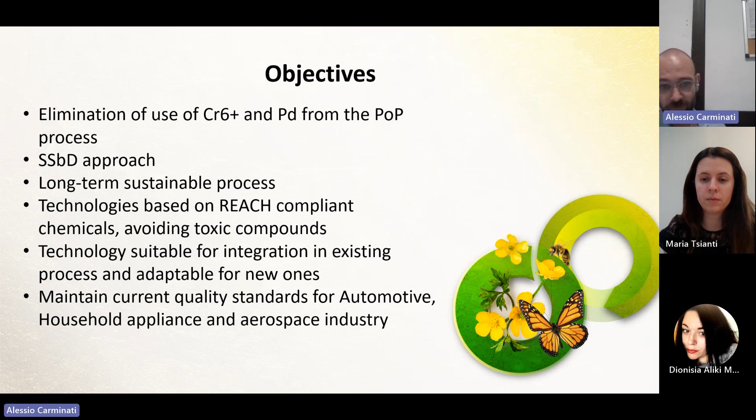Right now, the objective is also to develop a substitute process capable of fitting inside the already used technologies, or needing just a little bit of modification. And of course, to be effective for the industry, you have to respect the same quality standards that are already used in the industries with these products.

So plating on plastic is found almost everywhere in daily life. You can see here some trim, some plastic parts inside a car that are covered in metal, but are made, of course, of plastic. The most used plastic is ABS or ABS polycarbonate, and this kind of material is widely diffused almost everywhere.

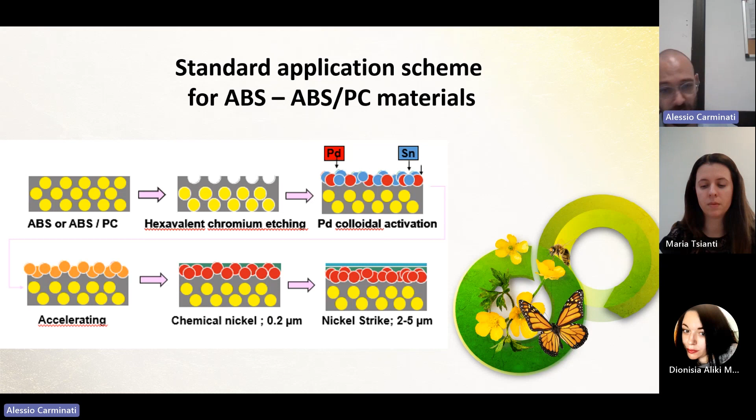Basically, the process involves a first step in which the surface is made capable of sustaining the metal plating at the end of the process. So we have an etching with hexavalent chromium that roughens the surface, and then an activation with a noble metal, palladium, that will maintain the substrate capable of receiving the chemical nickel, the electroless nickel, on it. These are basically the steps involved and the type of parameters of a standard process.

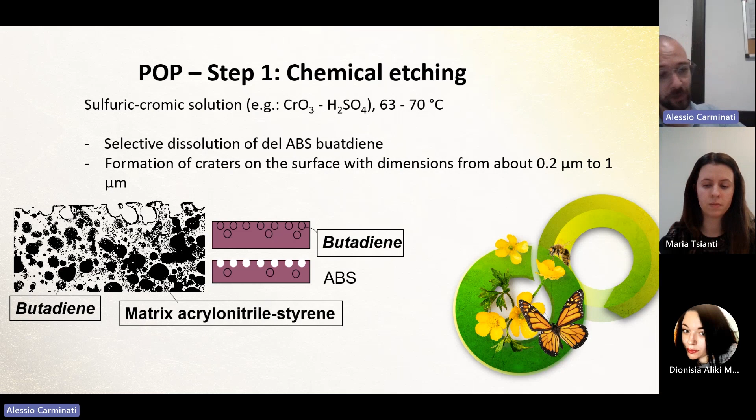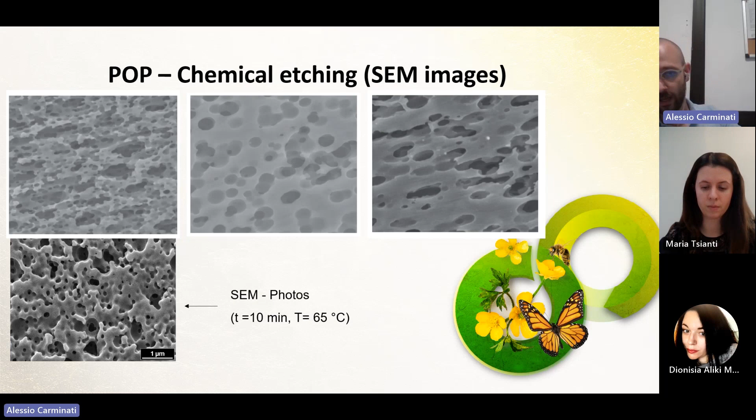There are quite a few steps, also because it's quite a mature process, the one of plating on plastic. But basically, the more toxic step is, of course, the one involving chromium 6 - chromium trioxide and sulfuric acid at high temperature, which causes the selective etching of ABS with a good property of the surface for most metals. These are the effects of chromium 6 on the surface of the material seen under the microscope.

After that process, we have a series of steps that involve the neutralization of the chromium, also to be sure not to put it in the environment, because it's a high risk of pollution and permanence in the environment.

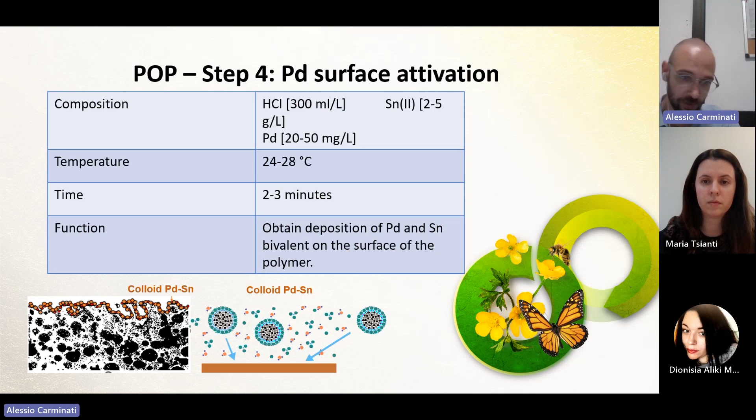The next step is just preparation with hydrochloric acid, and then we have an activation with colloidal palladium, which is not very economical, but right now is the most used solution for the activation of the surface, because it's a very good activator. Then some other steps involve the final activation and the plating of the plastic.

So FREEME has two types of technical approach to remove chromium and palladium. The first one uses a special resin developed inside the FREEME environment, using a green process and sustainable chemistry from the beginning of the synthesis of the resin.

On the other hand, we have a different approach that involves the use of other chemicals, but the same type of plant currently used — a plant that involves a dip process of a part.

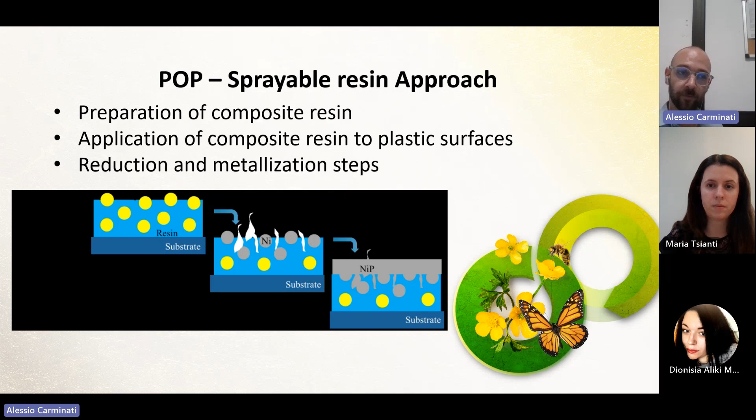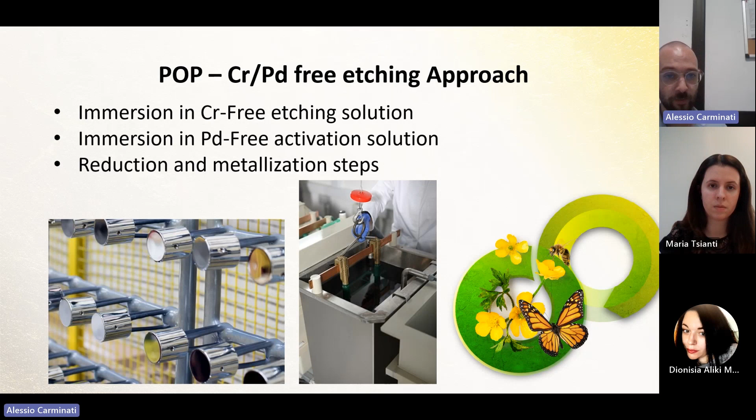So the output of this process is, in both cases, the inclusion of metal particles that will catalyze the reaction of electroless nickel on the surface, and then the further plating of other metals on the surface. This is the kind of racks and plating equipment that will be used inside the project.

For the project, we'll also use more modern modelization techniques, like the in silico approach or other parametrical modelization, so that the output of the process can be seen before the end of the process. There will also be an inline protocol that uses spectroscopy to inspect the part and assess the quality, meeting automotive and aerospace quality requirements.

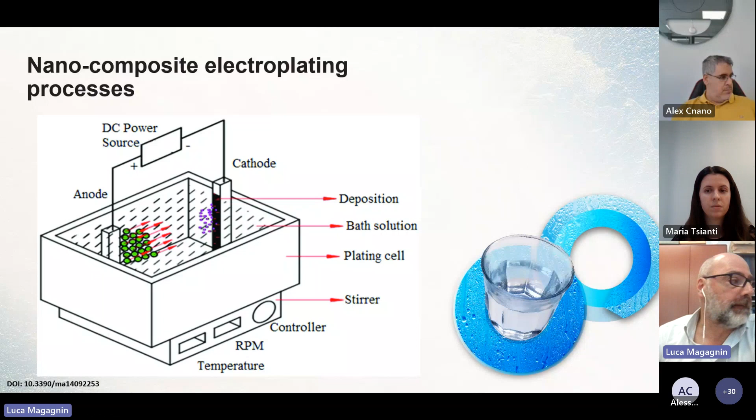So the equipment, in order to maintain dispersion, is an important part of the project. The capability to analyze and verify the dispersion, as I mentioned, the online monitoring, and very important also all the aspects related to simulation. So the capability to foresee how many particles will be co-deposited in specific conditions, in correlation with the geometry and size of the final component.

Here are the work packages, mainly dedicated to the major aspects I have mentioned. So apart from work package 1, management and coordination, of course, as we know, all the coordinators know very well these work packages are really important.

The first part of the project, we are more or less at the first year, was dedicated to the definition of the specification and the requirements, because we are within the idea of safe and sustainability by design strategy. We have to collect the needs and the possibilities to meet these needs and to define the best strategy in terms of safety and sustainability. So it's not only safety, it's also sustainability of the process at the industrial level.

Then, of course, we have one work package dedicated to in silico work, as I mentioned, both for the simulation of the electrochemical process and composition, but also for the maintenance or control of the process.

A work package completely dedicated to safe and sustainable by design, for the use of this approach in plating of composite processes.

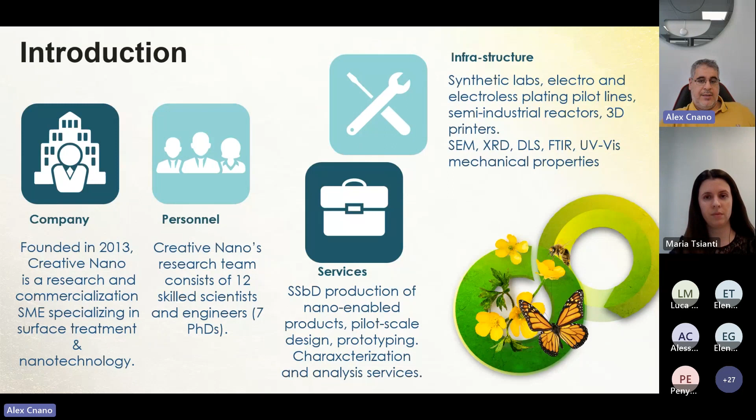Of course, our main target is to develop new types of coatings utilizing electroplating or electroless plating processes. We have synthesis labs, pilot lines up to 250 liters for demonstration activities and small scale productions. We have 3D printers and a fully equipped laboratory for characterization with SEM, XRD, DLS, FTIR, UV-Vis, etc.

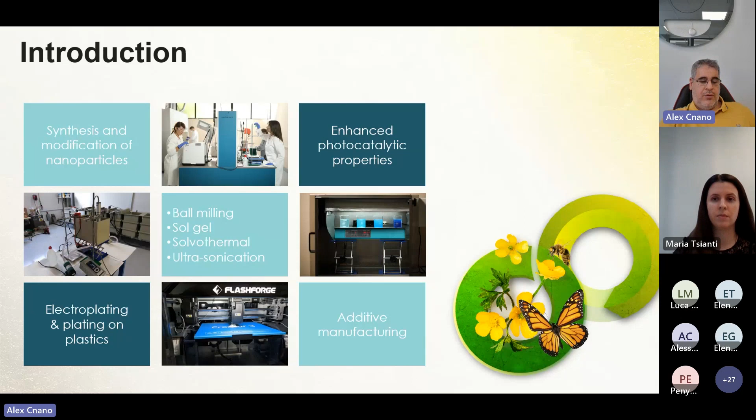As I said, we can work on electroplating and plating of plastics, synthesis and modification of nanoparticles, enhanced photocatalytic properties, various preparation methods with a great focus on the ultrasonication process and additive manufacturing.

Here we have some projects. I included the ongoing projects, except from Pure Nano, which was finalized some months ago, coordinated by Luca from Politecnico di Milano, related to the purification process of plating baths.

Nanopart is an ongoing project about development of methods for analyzing in situ nanoparticles for composite plating. SABYDOMA is a sustainable-by-design project for development of new types of processes and equipment that will be more sustainable and safe for the workers and the environment.

Diagonal is very close to the SABYDOMA project I mentioned before, but it works mainly with 2D nanoparticles like graphene. 3D Plate is a Greek national project about plating on plastics, and the two projects already presented by Alessio and Luca are the Frimi and the Mozart project.

So, the plating industry. The global electroplating market value and growth projection we can see here. We are discussing an industry estimated around 24 billion dollars. This number consists of the plating shops.

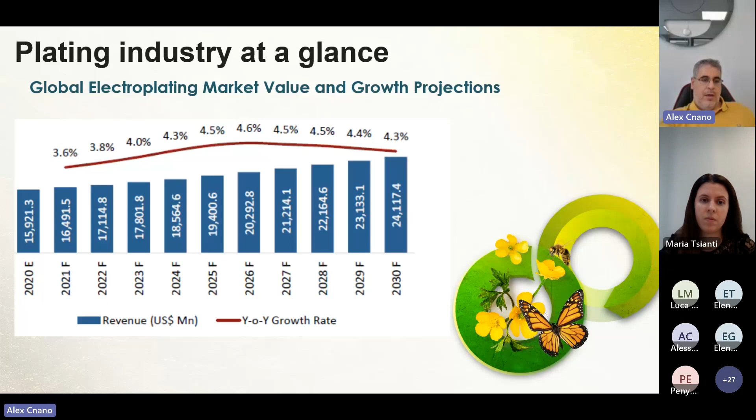The market that we're covering, based on the metal used and the end user we work for: number one is gold, not so much because of the mass, but mainly because of the price. Then we have silver, copper, nickel, chromium - steel chromium plating is part of this - zinc and other. The largest end user is automotive, followed by electrical and electronics, aerospace and defense, jewelry, machinery parts, and others like silverware, optics, etc.

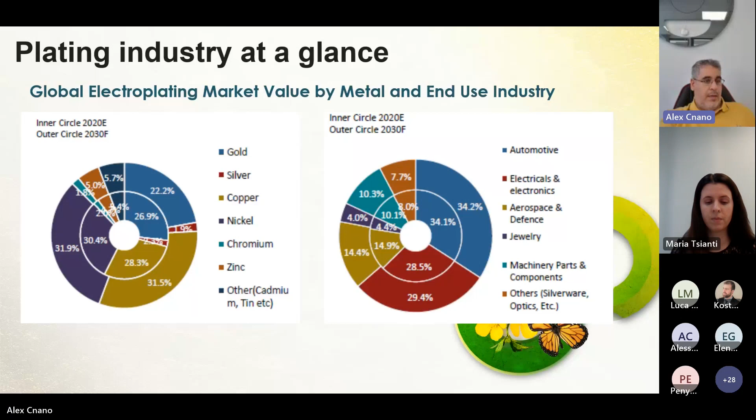The main driving forces - we have separated this into the main driving forces concerning the surface finishing and plating sector, and the supply chain and trends followed by the plating industry showing new advancements.

So the main driving forces are high demand from Asian countries, increased demand from diverse industries - this is a very important issue for what we will discuss in this presentation, that electroplating covers a large range of applications. It's not a process focusing on automotive or aerospace only. There are a lot of different applications, which means a lot of different specifications and standards.

We have many emerging applications in the automotive industry, especially now with electric vehicles. Many things are changing, standards are changing, new opportunities are emerging.

Finally, a main driving force, especially for Europe - this is not so valid for Asia - is increasing stringent environmental regulations. That means many substances, many chemicals currently used by the industry, the European Commission has decided either to ban or restrict their use. So we have, for example, as Luca said, hexavalent chromium, boric acid, PFAS, etc. This is what we have to take into account for the next year.

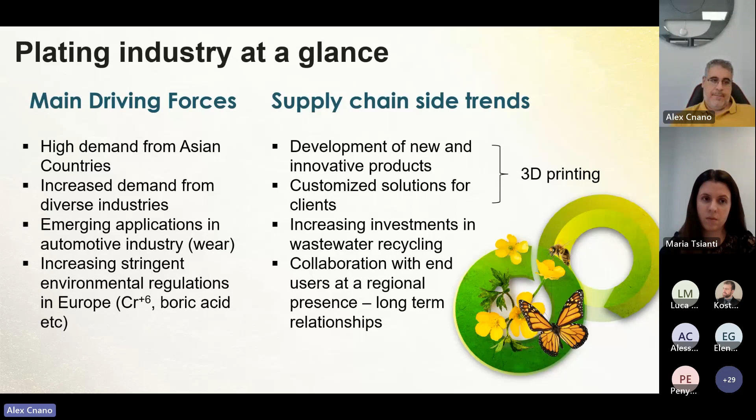Now, when we come to job skills in the plating industry, I will link this with the impact analysis of the key success factors, because the most important part for a successful company is its personnel. And nowadays we are discussing high-skilled personnel in the plating industry. Of course, high-skilled personnel with deep knowledge of the science, etc., means higher labor cost.

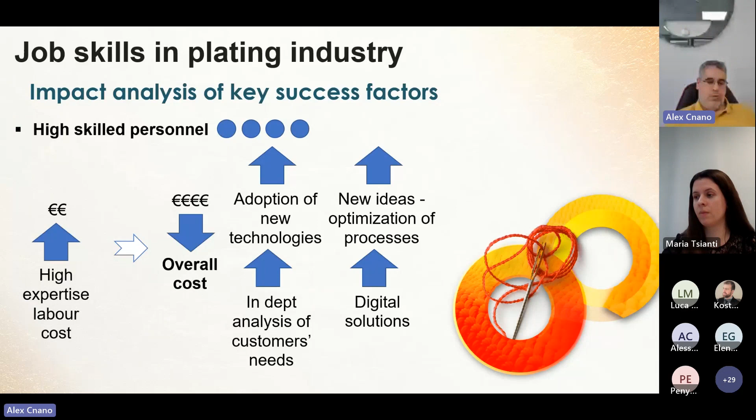So as I said before, we have plating shops and in-house plating facilities. Based on recent data from 2019, it's estimated that around 250 to 300,000 persons are employed in plating shops, meaning subcontracting facilities. And it's estimated that a similar number is occupied in in-house facilities of large enterprises. When you go to the plating shops, the average number of employees is between 11 and 12 per company, meaning what we call family businesses mainly.

We should also say that the vast majority of these plating shops, more than 60%, employ 1 to 10 persons, usually 5 to 6. So we can see there is a big differentiation here: a very large number of very small companies and a small number of larger companies that employ more persons. Finally, the level of automation is proportional to the size of the company, meaning the more personnel the company has, the higher level of automation applied.

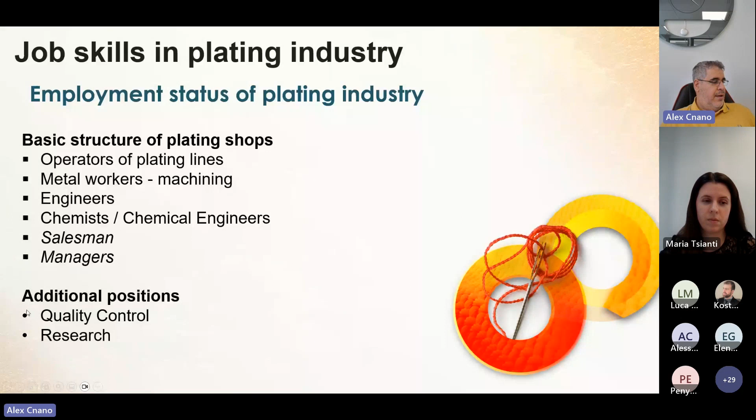Here we have the basic structure of a plating shop. We have operators of plating lines, metal workers, and machining. This is not always the case, because some plating shops only do the plating process without preparation of the samples or metal articles. We have engineers, chemists and chemical engineers, and of course sales managers, but we won't discuss them today. Additional positions are quality control and research, which can be covered by engineers and chemists or chemical engineers, but again this part is not always seen in many plating shops.

So when it comes to operators of plating lines and metal workers, for production and processes, we need people with good knowledge of raw materials and chemicals, basic math calculation, knowledge of basic quality control systems, equipment operation and monitoring, and basic knowledge for maintenance of this equipment.

They should always be trained to have excellent knowledge of safety procedures, as we're discussing a high-risk industry because of the heavy metals and the significance of environmental damage that can be done, as well as on the health of the workers. So health and safety measures should always be one of the main training courses for people working in the electroplating industry. Soft skills: critical thinking, listening, speaking. Listening means people should understand very well what their colleagues are saying, and also communicate potential problems in production, team working, and time management.

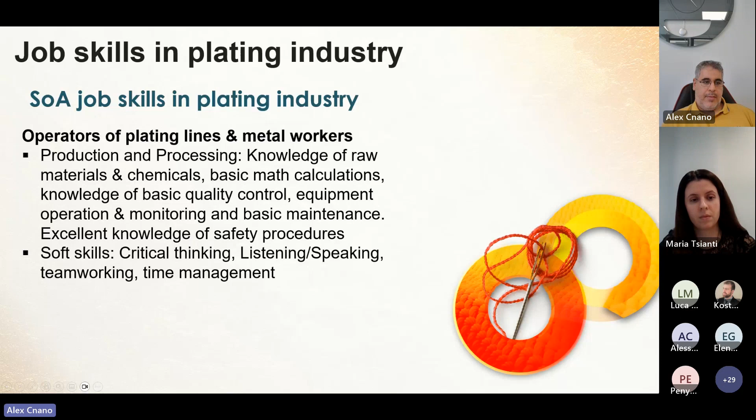When it comes to the higher level of personnel, engineers, chemists, and chemical engineers, for production and processing, the hard skills they should have include excellent knowledge of raw materials and chemistry of baths, excellent handling of equipment operations and monitoring, understanding of basic IT—this is very important nowadays with digital solutions—deep knowledge of quality control including advanced characterization techniques, understanding and translating end user specifications, excellent knowledge of applying and monitoring safety procedures, and deep knowledge of standards and legislation.

And for the soft skills: organization, leadership, critical thinking, team working, and time management.

Here we have put some advanced skills that someone cannot find in every plating shop, but given the fact that we are discussing a transition to a greener sector, as Luca said before, like the replacement of hard chromium, we have put some skills that we believe plating shops should nowadays have in their workforce. So we are discussing deep knowledge of electrochemistry, knowledge of nanotechnology, surface chemistry, simulation and modeling, data management, artificial intelligence, and machine learning.

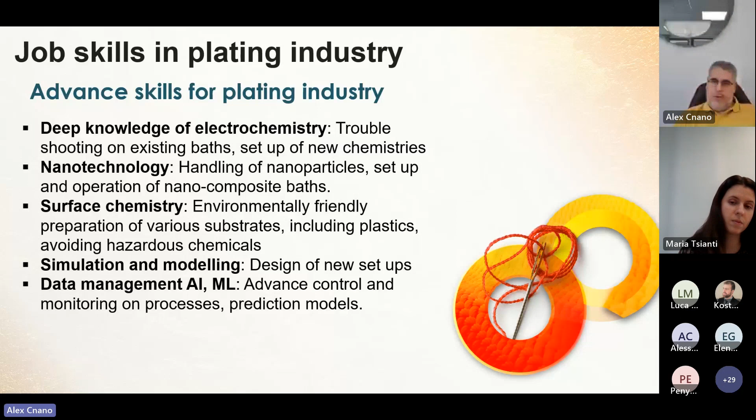So, concluding, we have put here a series of examples of how these advanced skills can assist plating shops in shifting to a greener, more environmentally friendly, sustainable technology, and of course one of lower cost.

Today there are a lot of efforts to replace existing baths. A well-known bath is the Watts nickel bath that contains boric acid. Given that boric acid has been characterized as a substance of very high concern and has been listed, we should make some transformations to the bath. So the first step is to work on the electrochemistry of the bath.

Here we can see some examples run in Creative Nano, utilizing advanced electrochemical stations that can perform cyclic voltammetry, scan-dependent cyclic voltammetry, chronocoulometry, etc., in order to extract insights about the use of various acids besides boric acid, giving a first indication of how these new formulated baths can behave based on their electrochemical profile. For example, from cyclic voltammetry we can see the potential for nickel reduction, whether it is easy to achieve or not.

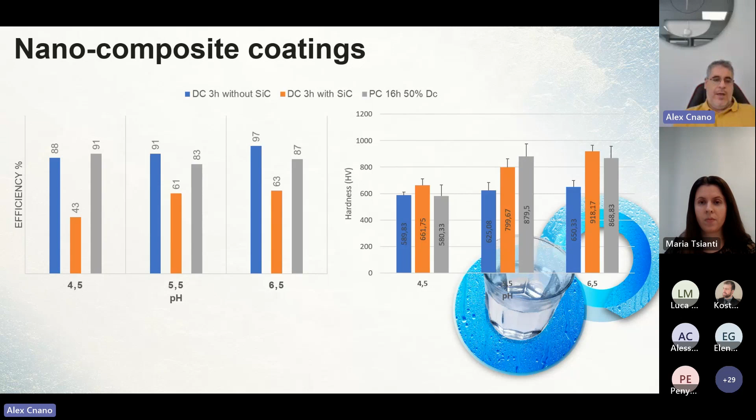Another example is the redesign of plating baths, especially when it comes to composite plating, where we have particles inside the bath solution. This is a very big change for the bath, so there's a big need to keep nanoparticles always in suspension. The level of dispersion we achieve in the plating bath is the level of dispersion we will have for these nanoparticles in the final coating. So excellent dispersion in the electrolyte means excellent coatings.

This is a combination of the Sabidoma and Mozart projects. You can see how we can shift from a single tank bath to two tanks that are connected, in which we can apply ultrasonication so as to increase the dispersibility of the particles inside the solution and to achieve better coatings.

It's characteristic that with the traditional one-tank bath, under the same plating conditions, we achieve coatings with 0.2% silicon carbide with very bad distribution, versus two-tank coatings that can reach 3% silicon carbide with excellent distribution. This translates to better hardness, a vast increase from 500 to 800. Additionally, we can have a reduction of wastes in the rinse tanks at a level of 85% for silicon and 65% of nickel, what we call the drag-out phenomenon.

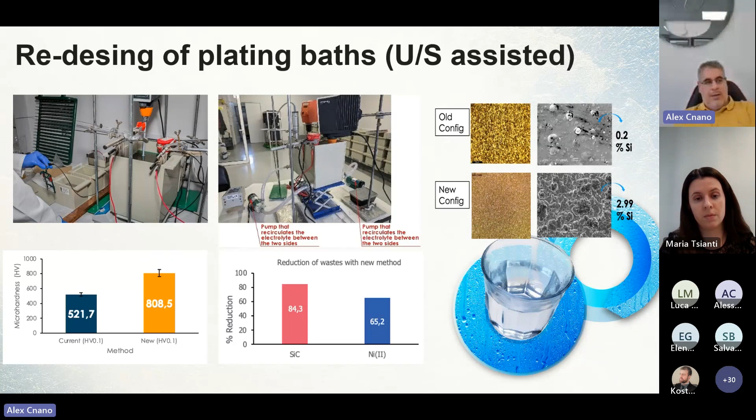Green plating on plastics is the FREEMI project, and what you'll see here is a combination of the FREEMI project and the 3D Plate project that we have run in Creative Nano. So without the use of chromic acid, without the use of palladium, we can modify the plastic surfaces or resin surfaces. This is an example from a 3D printed resin object.

We can see here with FTIR analysis how we can transform the as-printed surface to a surface that can have active links in order to attach the precursors for the electroless plating process. We can see here with some images and EDS analysis the level of the adhesion.

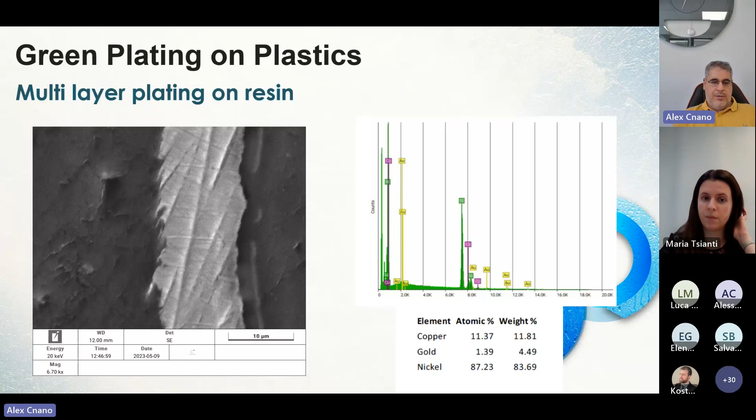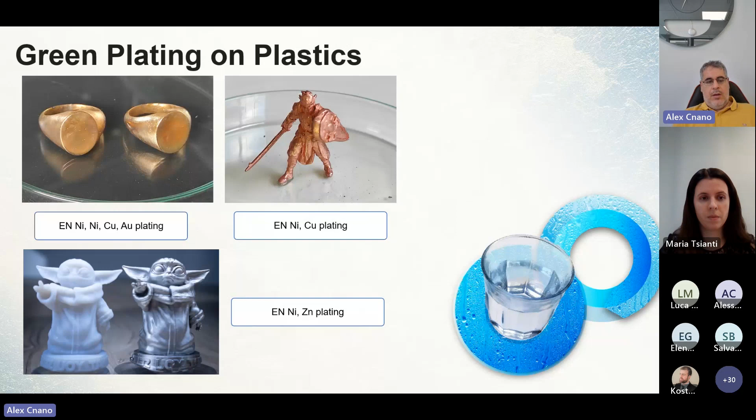Here we have the substrate, the coating, and the epoxy resin. You can see that we can have excellent anchoring of the coating in the substrate using such technologies and different types of coatings. Here you can see the final object: rings started with electroless nickel, a nickel type of bath, copper, and a final top coating of gold, and of course copper plated or zinc plated.

Finally, this is an extraction from the Mozart project. We can have the development and utilization of IT tools in order to develop predictive modeling or decision support tools that can assist the overall plating industry to shift to more green technologies, through utilization of data generated by experiments or, as Luca explained before, by in silico technologies.

So we have the user specifications as a starting point, we have modeling and simulation, we have experiments, we have loops, so as to deliver a final, quick presentation of how a new bath should be set up in order to have a good final result of the coating.

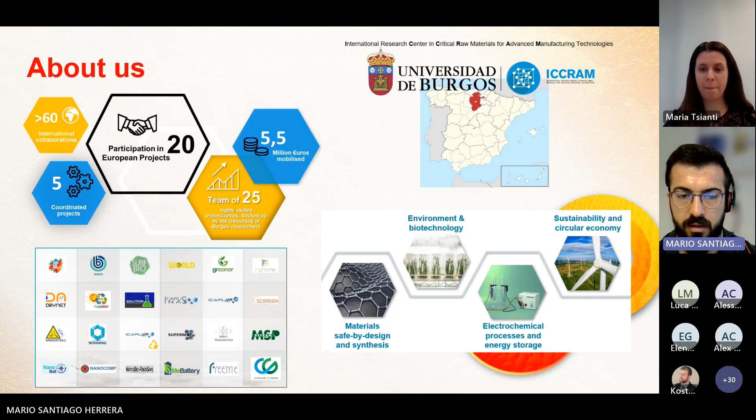Regarding safe and sustainable by design for metallic coatings and generic surfaces, the idea is to produce these products without the use of toxic substances and heavy rare elements, as for instance Alexio explained in the first presentation, and also to improve the performance of these products. This is currently a really important area of research and development, with more and more research and studies on these topics.

In the last decades, the European Commission has released different directives and strategies, like the European Green Deal or the Circular Economy Action Plan, trying to reduce the negative impacts on human health and environment. Finally, at the end of last year, in December, there is this Commission recommendation to establish a European assessment framework for safe and sustainable by design chemicals and materials.

Under this framework, we are going to develop our safe and sustainable by design strategies. This framework is divided into two stages: the first is the redesign, and the second is the safety and sustainability assessment. It was an iterative framework, meaning you first start with your initial design of your process, chemical, or material, and do the different assessments. Then with those results you can redesign based on some principles I'm going to show now, and then assess again and see how you are improving your products.

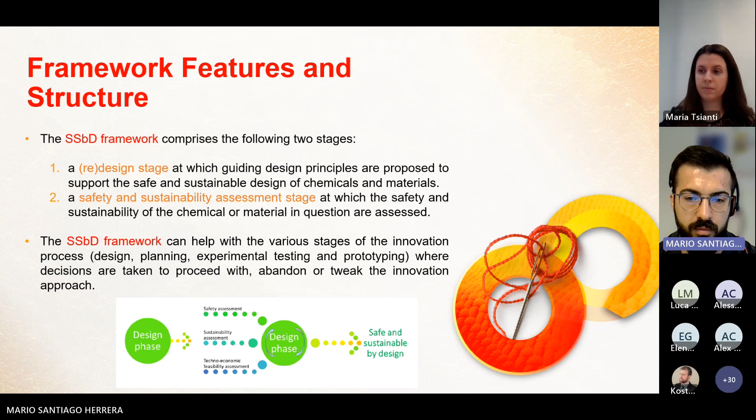So it works like this. This is a scheme to better understand. We first have the design principles with different actions and indicators, and it works in an iterative way, also helping to increase the innovation of the process. Then we move to the safe and sustainability assessment, which comprises 5 different steps that I will also explain later.

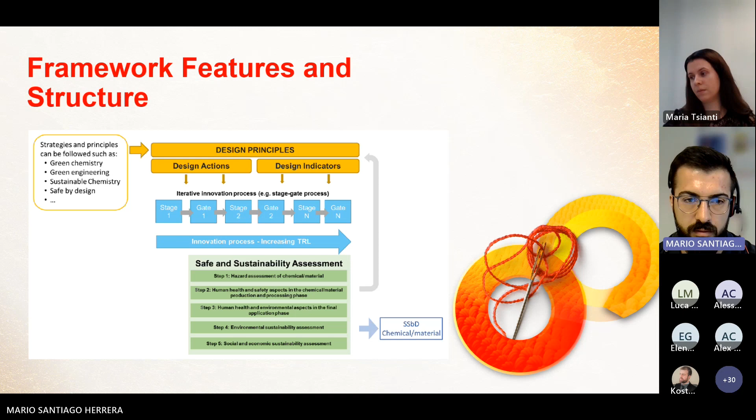Regarding the first stage, the design or redesign principles, these are the principles established by the Commission. They are mainly about the efficiency of materials, so using fewer raw materials and generating less waste. Also, try to use chemicals or materials that are not hazardous. It's important to minimize energy use and change to renewable sources. Also, in between the process, try to avoid some of the emissions you normally have, and this is inside the thinking of the life cycle, trying to also design for the end of life of the product, so they can easily get into the chain again.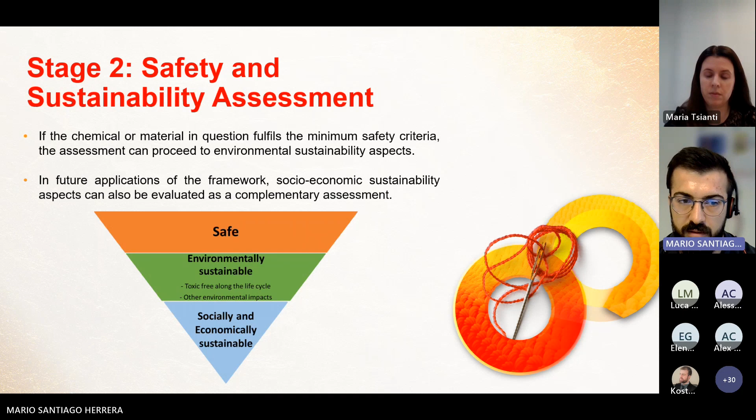For the second stage, the safety and sustainability assessment, it works in a hierarchical approach. The most important part is the safety or toxicology of the chemical and material. If it's safe, it can pass to the next step, which is to assess if it's environmentally sustainable, and then we have the last step, which is to assess if it's socioeconomically sustainable as well.

Just to show it all together: for the safety, we have 3 steps. The first is the intrinsic hazard properties of the chemical or material. Second, we have the occupational hazards during the production and processing phase. And the third step is related to the application or use phase of this material.

Step 4 is the environmental part, and here we use life cycle assessment methodologies. The last step is the social and economic assessment, and there are different aspects you can evaluate here, with different methodologies that are still at a lower maturity state, but they are developing right now.

So here you can see maybe more easily: the first step is the hazardous properties of the chemical or material. Then you have to assess the production and processing. The third is the exposure or final application of that product. And at the end, we have the environmental impacts in different aspects, how they can affect the air, the soil, water, etc.

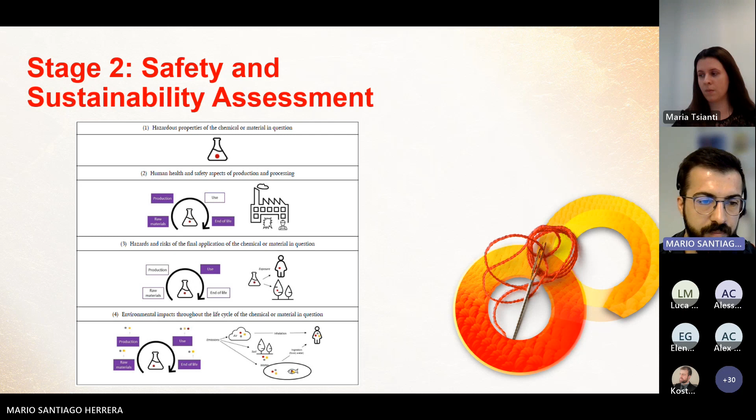In the safety part, we assess the whole value chain, and for the hazard, for instance, we assess the human health hazards with different indicators and techniques that I'm not going to go into deep detail on here. We also assess the environmental hazards, so how these chemicals or substance releases can affect the environment, and also physicochemical assessments. Then we assess the exposure pathways for humans and also for the environment.

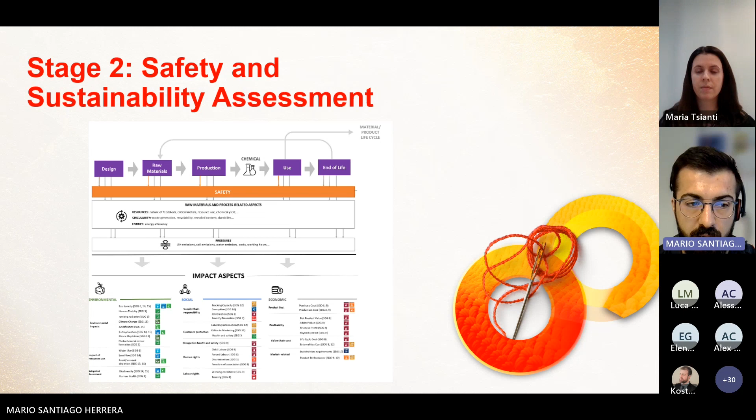Once this is done, we can pass to the environmental impact aspects, and here we use all the inputs and outputs coming from the different parts of the value chain of the production process, and the different impacts are related to the sustainable development goals.

Now we're going to see all the steps one by one. First, we have step 1, the hazard assessment. There are different criteria that this chemical has to pass in order to continue with the assessment. As I said before, step 1 is the most important. If the substance is among the most harmful substances, it's a cutoff criteria, so you can just stop there, and that's a no-pass for this substance.

And then you have other criteria, like if it's a substance of concern, or if it has other hazard properties.

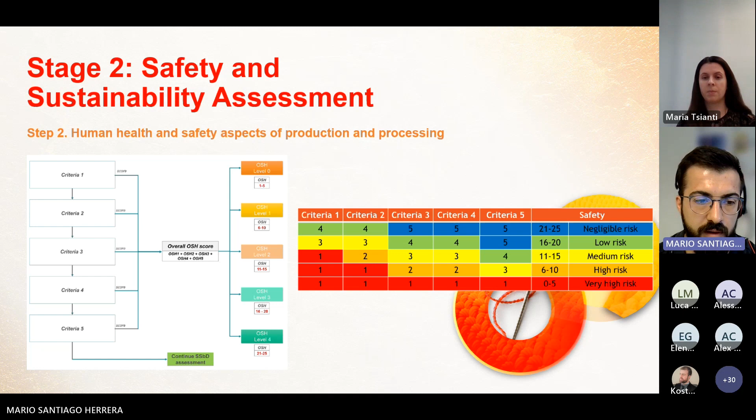If you pass those levels, you can continue with the assessment to the second step, related to occupational health and safety issues. Here we have different criteria, and depending on the risk, we give different scores to the substance under assessment. Then we pass to the final step, related to safety.

Here we assess the exposure of the material, and we make a different score depending on the criteria, whether it's above or below the safe level, and give different points to that substance. If we pass these three steps, we can continue to the sustainability part.

Here we have step 4, which is the environmental sustainability assessment. It's also divided into different criteria: one for toxicity, one for climate change, one for general pollution like particles, etc., and also criteria for use of resources.

We assess these different criteria by the life cycle assessment methodology, and depending on the improvement we have with this new design, we give a different score, and then we can see if we are passing to the next step of the assessment.

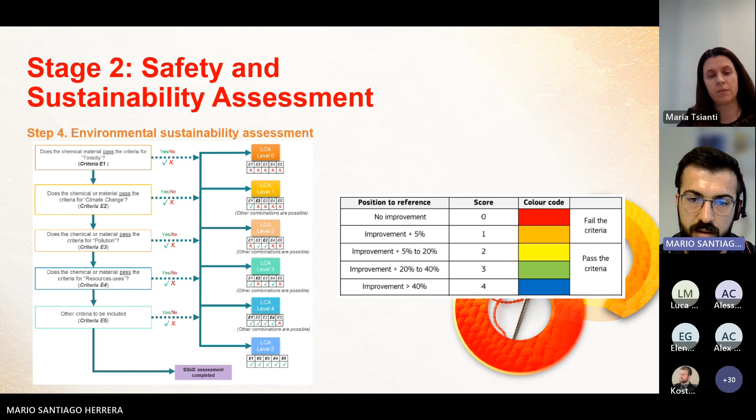The final step is the socioeconomic assessment, which is now under an exploratory phase. Here we can use life cycle cost analysis, cost benefit analysis, and social life cycle assessment, doing questionnaires for society, local community, or workers, to see how it relates to the substance under assessment.

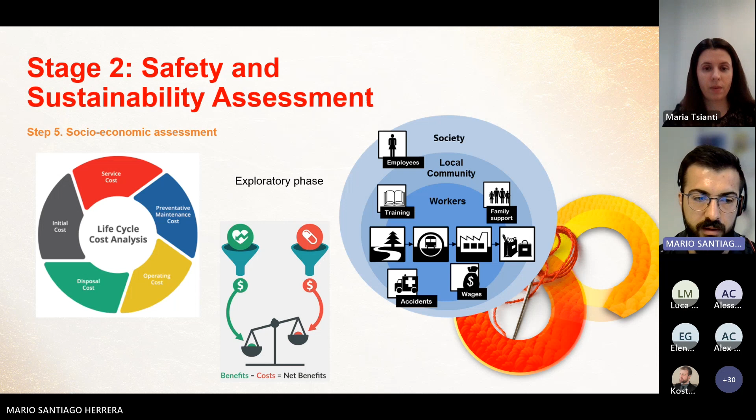And then we can give a final score. With this score, we can compare one substance or another, one chemical or another, or two different processes, or our process with a new redesign stage, etc. We compare with these numbers, and then we see if we are moving forward in a sustainable and safety approach or not.

So this is the framework we are going to apply, for instance, for the FreeMe project. We will focus on three different strategies. The first will be safe by design, to reduce the physicochemical and ecotoxicological properties of the materials.

We will also implement some strategies for the process. Then we will move forward to sustainability by design strategies to increase the sustainability performance of the process related to the project. Finally, we also include some recyclability and reparability strategies.

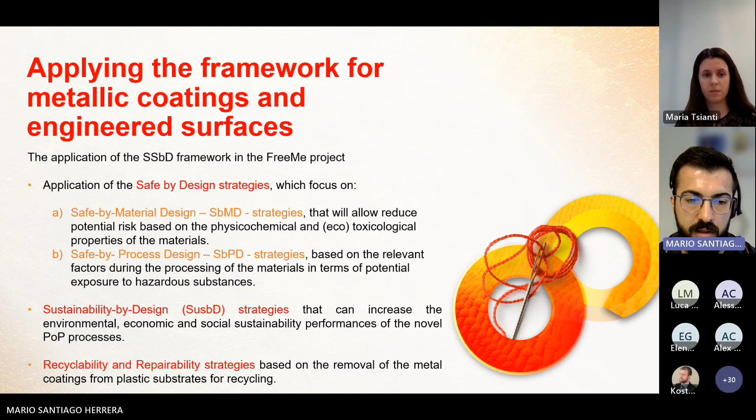If you want to go deeper into this framework, you have the Commission recommendation I mentioned at the beginning, released in December last year, and also two technical reports from the Joint Research Center about safe and sustainable by design for chemicals and materials, which are also very interesting.

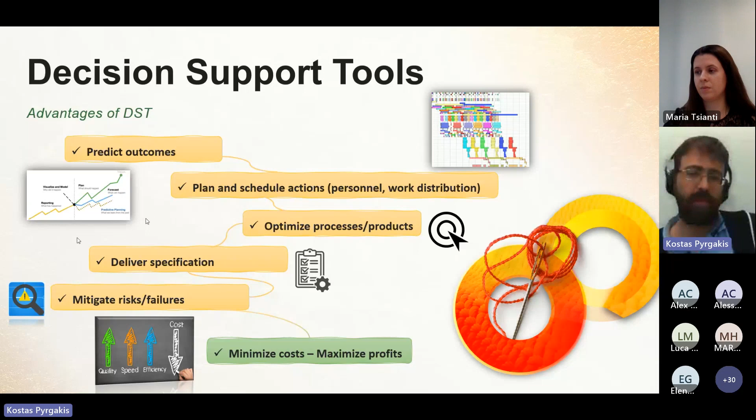So what used to be the conventional decision-making approach before the latest advances in decision support tools? The user, for instance an engineer, had to follow several trial and error cycles, which may take days, weeks, or months. Most times, intermediate decisions had to be made mainly based on experience or very simplified methods, and the engineer had to follow such cycles until reaching a better goal for decision-making purposes.

And actually, these final solutions may be subjected to non-optimality. They may sometimes be biased by the opinion and selections of the engineer, while it's still possible that some such solutions might be harmful or even have bad impacts in the future.

Instead, a decision support tool can examine the numerous parameters and variables of the problem, and it can provide, even in a few seconds, a set of best solutions to better guide the user, considering both present and future conditions, ensuring better solutions than conventional approaches.

In this scope, there are different types of decision support tools fitting the specific demands of each problem, available in the arsenal of the decision support tool developer.

One of the most common types are model-driven decision support tools, dealing with simulation or optimization models, returning trade-offs and what-if scenarios. Other cases are user interface decision tools, which offer working interfaces for direct insertion of data and visual checking of the outcomes.

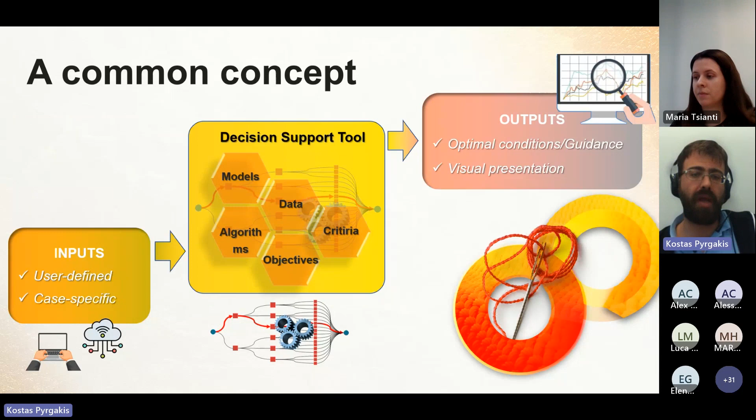A decision support tool is composed of models and algorithms. They also include data, criteria, objectives, and other case-by-case components needed to process any kind of user-defined inputs and case-specific conditions, while finally they return a set of most appropriate or even optimal solutions, conditions, and guidance to assist the decision maker, while also providing options if appropriately designed.

They also provide options and capabilities for visual presentation of the results. Now, bringing the context of decision tools into industrial dimensions, there is a wide range of potential applications where decision tools are used, differentiated, and adapted.

Scheduling industrial tasks consists one of the most common problems where they have been used, usually using surrogate models or simulation models and optimization models.

Other decision support tools are further focused on individual unit operations. They commonly consider thermodynamics, yields, and experimental data, and are used to tune or optimize the design and operating condition of a process, like for instance the design of a complex reaction separation system.

Moreover, recently, in the context of Industry 4 and Industry 5 applications, such decision support tools can operate and interact in real-time with other processes, with other units, and also with robotics.

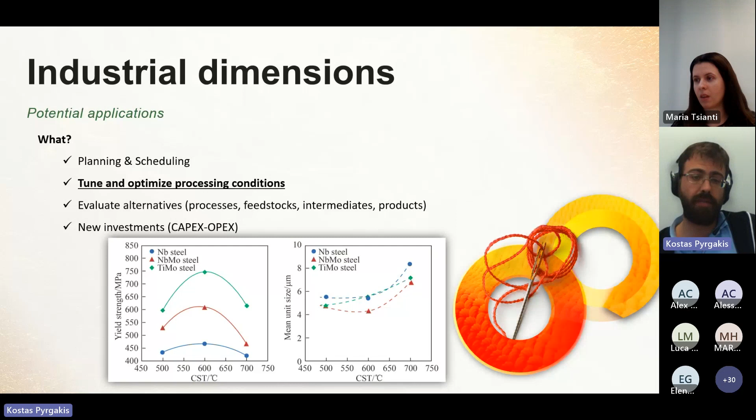So now, when the case is to screen alternative options, for instance to re-engineer or advance an existing or new plant, decision support tools come in to address the new industrial image with respect to the new value chains connected with existing and new components that we want to further integrate and advance existing plants.

And last but not least, decision support tools can also be used by combining engineering, management, and economic terms to examine trade-offs and identify regions of optimal operations in order to minimize cost and ensure safe and sustainable design and operations.

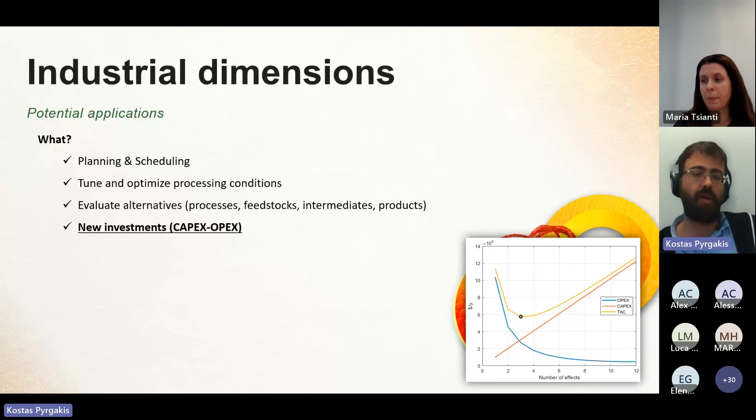Next, decision support tools can also consider various constraints and identify limitations in the optimization space. And actually, we have to admit that the more complex the problem is, the more constraints and equations should be considered, and thus we have an increase in the size and complexity of the solving procedure for such problems.

So one could build and solve smaller problems on paper, or use Excel spreadsheets. However, when the problem comes with hundreds or even thousands of variables and equations, the developer needs to build the decision support tool in appropriate environments like GAMS or MATLAB in order to deal with such big and very complex cases.

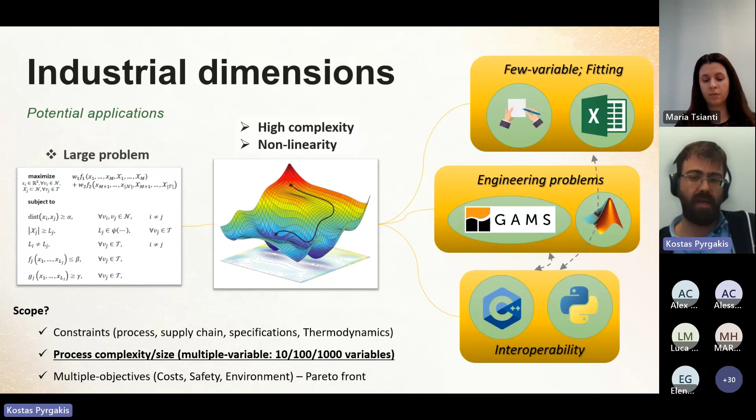Other options: when interoperability, for instance, or common languages are required in software applications, then other programming languages like C++ or Python or others could be used to appropriately handle the models and connect the different models, modules, and databases together in a whole and single application.

Another benefit is the use of multiple objectives in order to examine trade-offs of different goals, like the safe and sustainable by design problem. That could be, for instance, the trade-off between environmental and profitability goals.

Accordingly, the preview of objectives over, for instance, a Pareto graph can be used to identify best regions of operations, or even probably the developer can appropriately weight the different objectives by promoting a global objective for the whole application.

Next, we will focus on the problem description, as it is actually one of the most important steps in developing the decision support tool. It is fundamental to understand the nature of the problem and identify the best route to describe and depict the problem through a generic representation.

One typical approach uses decision tree format, which is also commonly called a superstructure in some engineering cases, where different design and decision options are packed using boxes or nodes and arcs, which connect all the different components of the decision tree.

Using this, one could prepare input and output balances across the components of the superstructure by using both continuous as well as binary variables, which can be used for the activation and deactivation of different kinds of options.

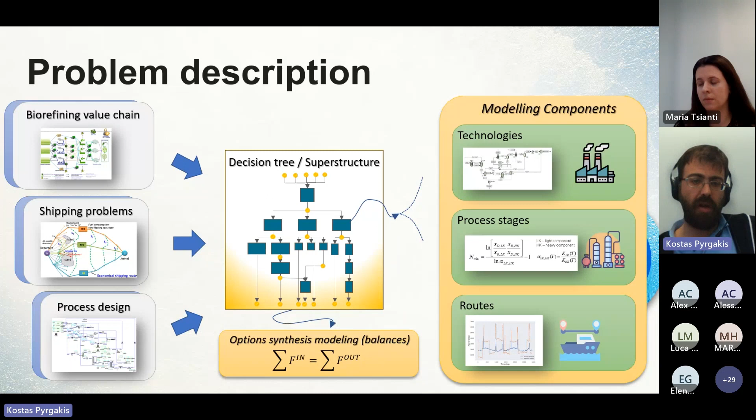So based on the problem representation, the modeling background runs in order to identify the best leaves of the decision tree, and by this means, trying to optimize, to maximize or minimize the value of the user-defined objective function.

A step further, post-analysis of the decision support tool outcomes may also require other decision tools that can be used in order to optimize the integrability of the alternative options provided by the previous decision support tool, and by this means, we can further improve savings or further improve optimality of the proposed solution.

So having now the superstructures, having the decision tree, the next question applies to the types of the different models which can be used and integrated in order to model the different outputs for each component of the superstructure.

So first, one could use, for instance, state-of-the-art models when modeling applies for well-known and typical industrial operations, for instance, a chemical reactor or an extraction column. These are typically based on mass balances and thermodynamics, and they try to simulate the outputs of a process unit with respect to the alternative process inputs and the design conditions used for this specific unit.

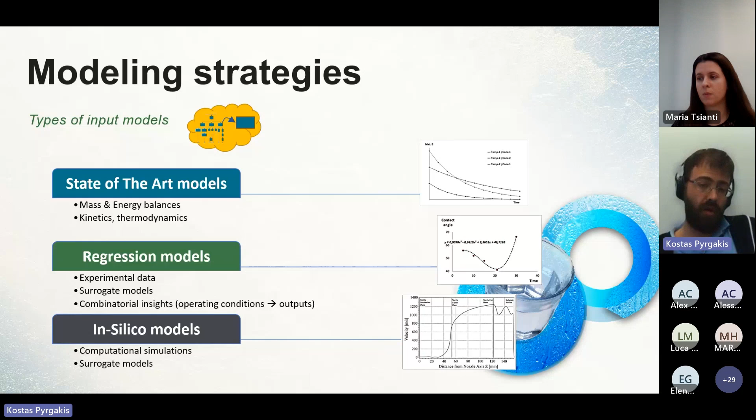And based on all the above components used in decision support tools, we could also present the nature of a decision support tool through a simplified illustrative example. Let's say that one case could be the optimization of a multiple-stage production line.

Here we have the individual process models for each processing stage, where each of them calculates the output compositions or the specifications of the product. Specifically, we can use, for instance, state-of-the-art models at the first stage, the etching bath, for instance, which can be used to model a typical reaction system.

While, for instance, at the second stage, where we have more complex systems, we could use in-silico-based results in order to model the stage by providing a surrogate model or other regression models that simulate the different operating regions of the stages.

And finally, we can also prepare additional regression models that could be used to simulate the response of the final stage, and this can also be used to calculate the value of selected specifications, like, for instance, the adhesion of a metal coating.

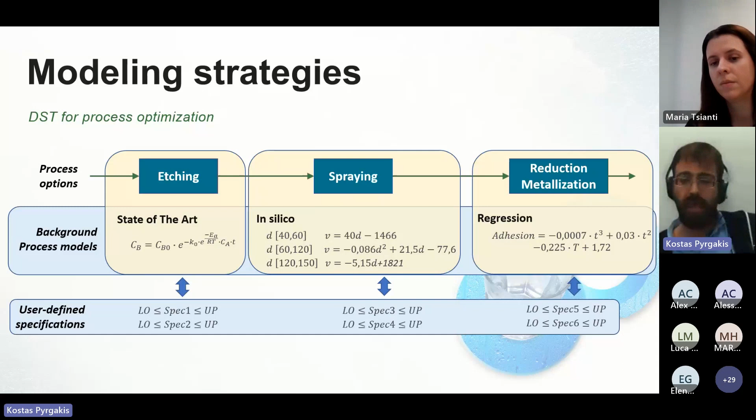Let's say that we have here the adhesion limits of a metal coating, and let's say that this is the only constraint set by the end user.

So based on experimental data, we prepared regression models that can be produced in order to estimate the adhesion value over the different concentrations and operating times of the previous production and plating etching step. And this kind of regression...

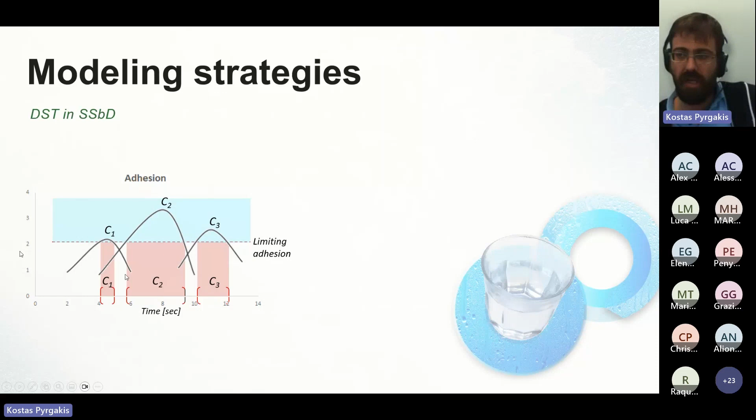So the operator can decide on any concentration and time within the blue and red regions in order to maximize the objective, which could be, for instance, the cost of the process. So the cost objective as a function of concentration and time will also be included into the model, and calculated for the different operating regions.

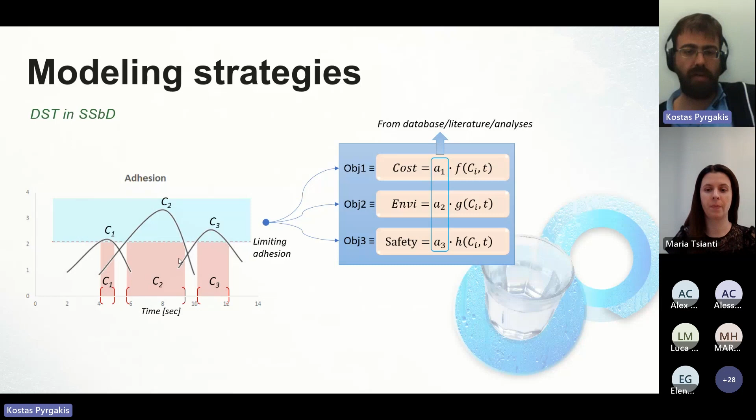By this means, we can include more objectives to address trade-offs related to, for instance, environmental or safety purposes and analysis. The decision support tool developer could offer an additional feature by weighting the different objectives and providing one single global objective, which could be considered for the optimization of the whole problem, of course considering any compromises among the different objectives used in the overall objective.

Before closing, it's important to set the decision support tool in the context of emerging machine learning dimensions. Such technologies can positively be affected by the implementation of decision support tools, for instance in real-time monitoring systems by filtering, mining, and analyzing big data. Another consideration could be integrating machine learning techniques to reformulate and calibrate the models of decision tools with respect to different invariances of the input data.

Finally, another approach could be to set up a post-decision support tool model in order to analyze the outputs and let the decision support tool learn from its outputs. It's like self-training the decision support tool, mimicking human intelligence.

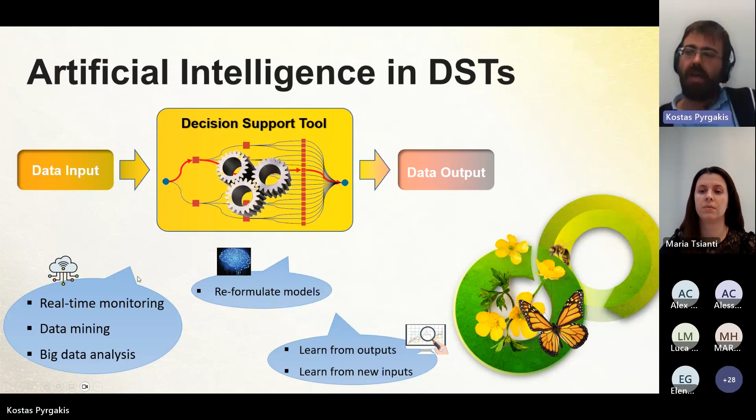To sum up, today we discussed the capabilities of decision support tools and the different types of decision tools that can be used for different cases and problems. They can be used for predicting outcomes, or scheduling and optimizing processes in order to mitigate different kinds of risks and costs. We also discussed the context of applying decision tools, both in industrial applications and in everyday life.

In all these decision support tools, we can use state-of-the-art regression or in silico models, which can be used to formulate the modeling framework of the decision tool and build the problem superstructure used for decision making. Finally, developers should always appropriately examine and decide which data and models are available and going to be used, in order to ensure and maximize reliability, consistency, and precision of the decision support tool outputs.

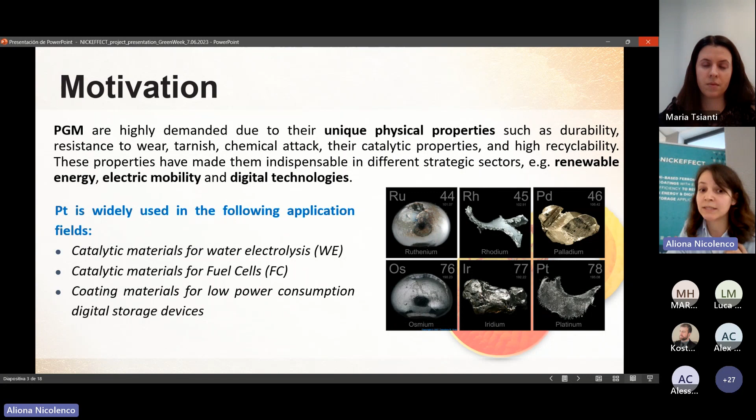If we talk about digital technologies, this is again another ever-growing sector that relies on the use of platinum. In this case, platinum is introduced in magnetic materials in order to provide them with some specific magnetic characteristics. Having said this, it is important to mention that the European Commission classifies platinum group metals as critical raw materials, meaning that they are of high importance for the European economy but also have a high supply risk. This is captured in numerous reports from the European Commission, different articles, like for example this one, that bring to our attention that nowadays it is crucial for the European economy to develop methods for PGM recovery and also find alternative materials to these PGMs.

Indeed, alternative materials to platinum group metals can help to avoid the problem of price and availability, and that is why many works are focused specifically on development of non-precious metals. In fact, it has been shown that nickel is one of the most promising candidates to replace PGMs in different applications. It is an earth-abundant element with ferromagnetic character that has some interesting properties and is actually widely utilized in different industries. But of course, nickel doesn't have the same chemistry as PGMs, especially in terms of durability and catalytic properties. So it is always important to find a kind of balance between the price and sustainability, but also the efficiency of the alternative material.

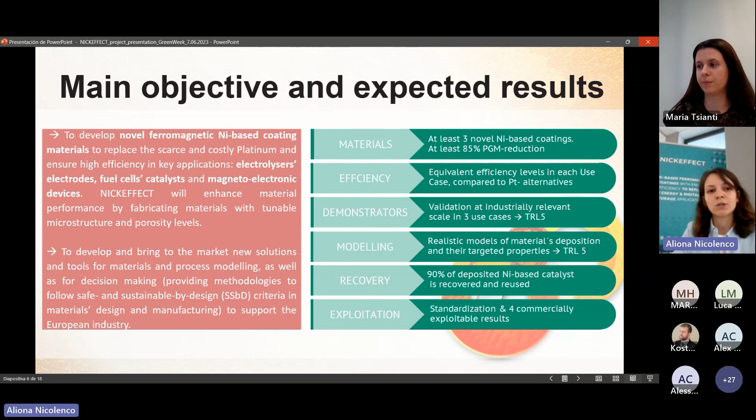Now it's time to present the main concept of the project. At the first step, we have identified several nickel-based alloy compositions that could be interesting and promising for the application of each of these specific use cases. Then we adopted several specific tools that will help us reach these project goals.

One of them is the adopted deposition techniques. Here we will explore different methods and combinations of methods that will allow us to tune the microstructure and porosity of the deposits. This process will be assisted by advanced modeling - on one hand, materials modeling, and on the other hand, process modeling, which I'll talk about in a minute. We also have at our disposal support for decision making that incorporates the SSbD approach.

All these tools together will help us prepare highly efficient ferromagnetic PGM-free materials that later will be incorporated either as MEA coatings, for applications in energy like water electrolysis and fuel cells, or as MRAM stack coatings for applications in digital storage devices. Finally, different metal recovery techniques will allow us to recover and reuse this nickel either for the same process or for other applications.

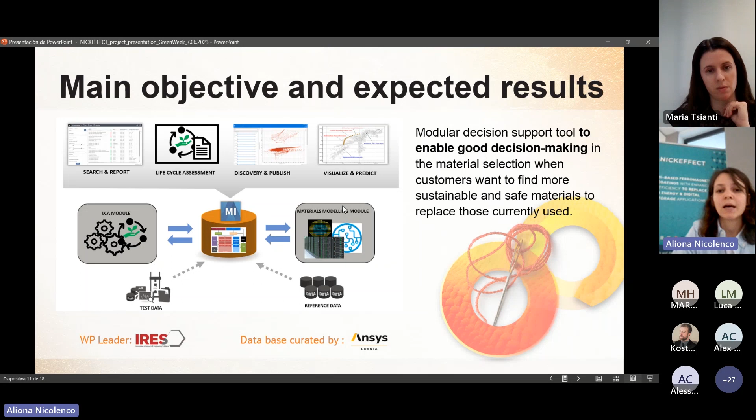So once again, the main objective of this decision support tool is to build an extensive database that will incorporate different sources of information, like the reference data, the experimental data, the LCA module, and materials modeling, and will allow the user to find more sustainable and safe materials based on preselected criteria.

So materials modeling plays a quite important role in the decision support tool that we are trying to build and integrate, and its objective here is twofold. First, it accelerates the material selection procedure by predicting the properties of materials even without the need to rely on experimental data. This is specifically important for us because we need to screen a lot of different compositions in a short time.

And then, once we pre-selected the most interesting material compositions based on the model predictions, materials modeling can assist decision making in materials design by guiding the experimental work towards achieving the compositions with the preferable chemical and microstructural performance.

So we also perform a chemical risk assessment inside this modular decision support tool, which aims, as the title suggests, to analyze all the risks and hazards involved in the process and fabrication of these materials that are of interest in NICKEFFECT. To do this assessment, we follow the PDCA cycle.

So we start with a method elaboration. We take as the basis some safety tools that have already been developed, but then we adjust them to the specific needs of the project.

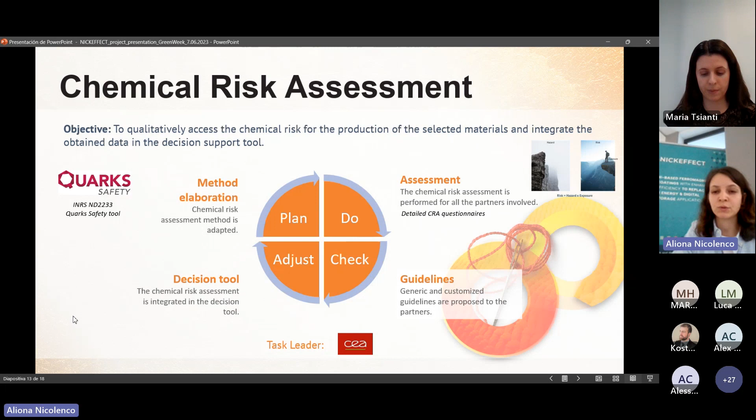And finally, the guidelines are incorporated in the decision support tool, so that will allow the user to pre-select the materials also based on these characteristics.

So the first step, we define the goal and the scope of the assessment - the boundary conditions, the objectives, and so on for each of the three use cases. And we specifically take into account the whole process, starting from the raw material acquisition until the end of life of the product.

So then, similarly to the previous case, the data are collected through dedicated questionnaires that are then assessed in step 3, where all the costs and impacts are calculated.

And finally, at step 4, the findings from the inventory analysis and the impact assessment are combined, and the conclusions are drawn so that we can evaluate the sustainability of these materials, and also identify some hotspots that may require our specific attention.

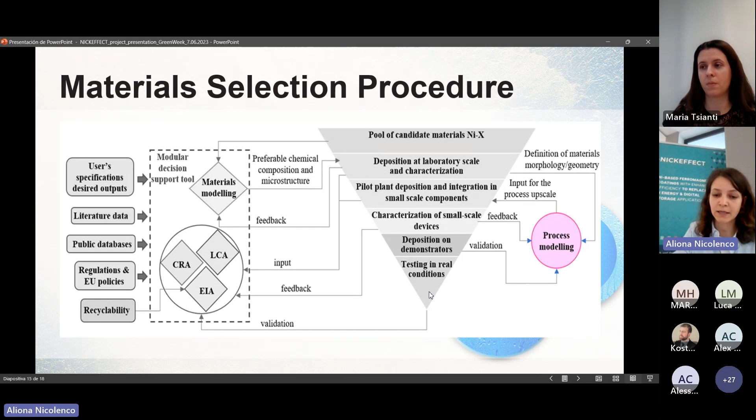Another thing I would like to mention here is the process modeling, which doesn't really support the modular decision support tool, but assists the upscaling process of the materials we'll be developing in NIC-EFFECT. The idea is to develop realistic models by combining several models that already exist, but can also be extended further, taking into account the specific geometries of the materials we target to produce.

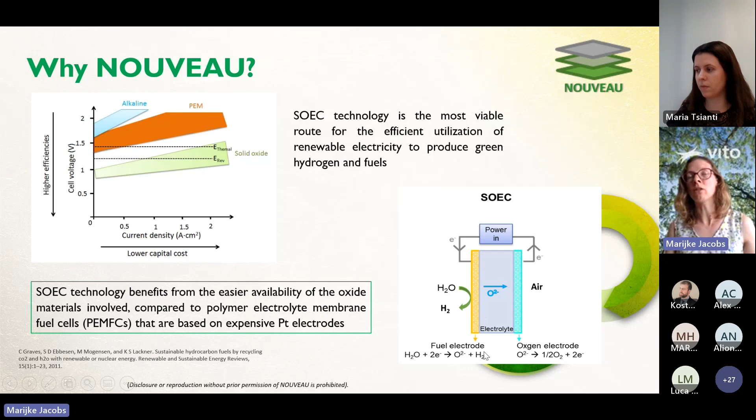Here you see how a solid oxide cell looks and works. We have three main components: a fuel electrode, an electrolyte layer, and an oxygen electrode layer. The electrolyte layer is dense but can also be thin depending on which layer is the supporting layer, and we have two porous electrodes. By sending in steam, it is converted to hydrogen, and oxygen transports through the electrolyte, with air on the other side. Renewable electricity must be supplied to operate this system at a high temperature of about 800 degrees C.

Nevertheless, although solid oxide cells don't use platinum, they contain other rare elements like yttria and lanthanum. Demand for these rare earths is expected to rise, and the European Union heavily depends on imports of these elements, which is not good if you want to scale up this application long-term. So we would like to develop alternative materials for use in solid oxide cells, and also focus on recycling rare elements from these cells.

Besides the solid oxide materials for the electrodes and electrolyte, the largest part of the solid oxide cell is actually the interconnect. It's a metal interconnect that has a huge effect on cost. Not only cost, but these interconnects also suffer from degradation as chromium evaporates, which degrades the stack over time. To avoid degradation and achieve a long lifetime, we will work on a lower cost metal interconnect with a protective coating, to produce cells with a longer lifetime and reduced cost.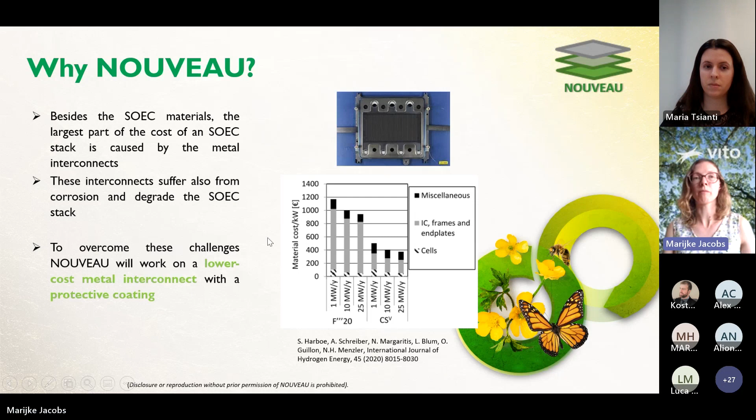We will focus on the recycling of yttria, and on an anode material where we'll focus on the reduction of the amount of rare elements. We would like to focus on lanthanum-free materials, and this we will try to achieve by employing innovative coating methodologies and modeling in combination with sustainable by design aspects and recycling options. We aim also to reach TRL5 in the end.

So here you can see our work package distribution. We have the standard work packages like management and coordination, and dissemination, communication and exploitation. Then we have our two main material work packages, the sustainable oxygen electrode and the interconnect coating and integration, together under the umbrella of the metal coating system for safe and sustainable solid oxide cells.

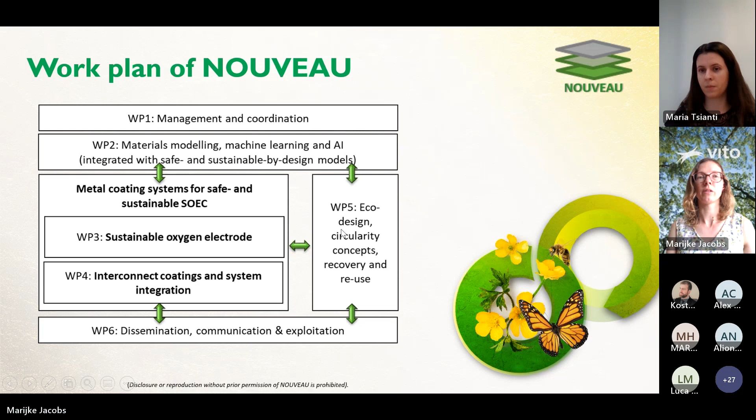So first, let me say more about the Nouveau methodology, more specifically on materials modeling, machine learning, and artificial intelligence. There we will focus on developing new material models and predictive models to develop and implement multi-scale bottom-up methods. We would like to develop virtual screening and predictive models.

These predictive models can then be used to assist the material selections in work packages 3 and 4, reducing the need for all the experiments by assisting the experimental selection of materials. And also here it will be integrated with safety by design tools to support the experimental part.

In work package 3, we will focus on materials development, using no lanthanum and other rare elements. We will use the benchmark coating technique like screen printing. This is led by CNRS.

Then we have materials manufacturing, selected based on experimental work and modeling from work package 2. This material will be manufactured by Marion Technologies. And then we have lab-scale spray coating of electrode materials, where there is an optimization of the microstructure by tuning the electrode material.

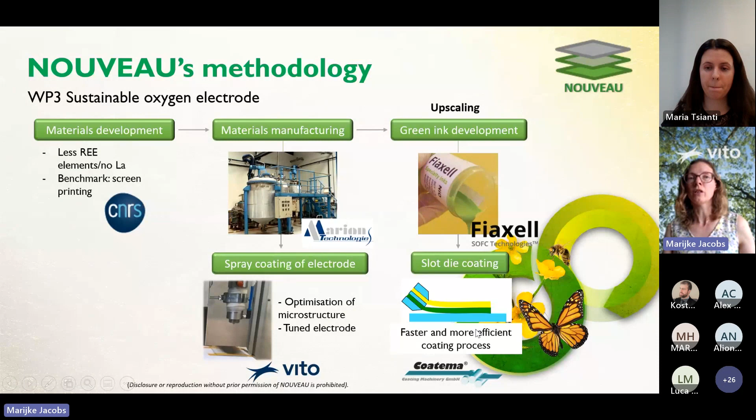In the upscaling phase, we have green ink development by Fiaxell, and this ink will then serve for the slot die coating by Coatema, to have a more faster, more efficient coating process to achieve efficient solid oxide cells in the end.

In work package 4, it is focused on interconnect coatings and system integration. For the interconnect, this is led by Forschungszentrum Jülich with the support of Acerinox and VDM Metals, and they will focus on new material selection with the reduction of chromium amount.

Besides, in the end you have the Nouveau anode material, the new interconnect, and then all these parts should be brought together for system integration and testing. This will be done by Fiaxell in Switzerland, as they have the knowledge to make a small stack and test it in the end, to see the effect of the new coating systems and new materials on the performance of the stack.

Besides the experimental work, there's also a main work package on eco-design and circularity concepts, focusing on sustainability. We have on one hand the life cycle assessment and design for sustainability, led by IMDEA Energy Institute in Spain. They will not only perform the life cycle assessment, but also focus on the social assessment and the cost and eco-efficiency, to have the safe and sustainable by design approaches included there to support the experimental part as well.

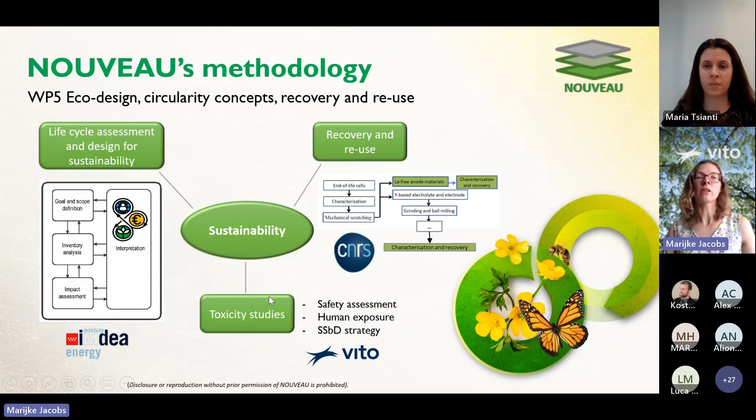We also have toxicity studies, focusing on the safety assessment of human exposure, in line with REACH compliance, and they will also use the SSbD strategy. This is done by VITO to study the health aspects of the new materials.

So in the end, we would like to achieve a good impact with the Nouveau project, focusing especially on the societal impact. Of course, solid oxide cells don't use expensive platinum like PEM cells, so they already score better compared to PEMs.

But as they still make use of rare elements materials, the dependency on these rare elements and the energy demand will be significantly reduced if we focus on recycling yttrium, and also if we reduce the amount of lanthanum in our cells. So that will have a good impact on the environment as well.

And if we switch also to green inks for the electrode applications, we will have more eco-friendly processing of solid oxide cells compared to current solvent-based systems. So we would like to increase circularity and lower the climate impact with Nouveau, and also the criticality of solid oxide cells, by focusing on efficient use of materials and waste management through recycling.

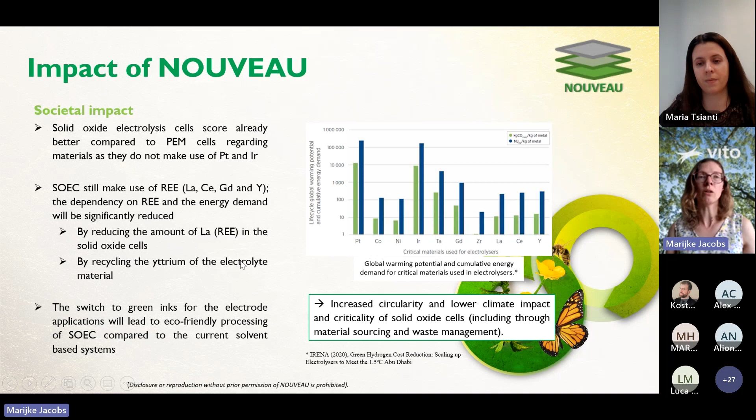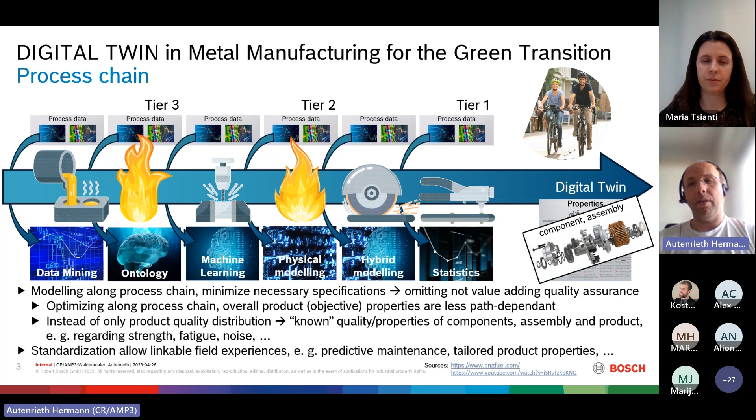The idea is that on one hand you have this hardware workflow where the component is manufactured, and now it's also possible, by acquiring data and by modeling, to build up some kind of digital representation of these parts, and then follow this manufacturing chain with the opportunity to be better at predicting quality measures, or to improve costs during this processing chain.

When... so can you hear me? So I have today, unfortunately, some connection problems. Yes, so I now hope I can hear you.

Connected again. So when we come to this digital twin definition, it starts perhaps with some kind of product sheet where some information is given, but this is not really deep information about an individual part. So let's say this is some low-level information for a component, but then you can go deeper in this field and get data from the field itself, like what kind of loading did the part see. When you couple this to the component, it has already much more value in it.

And then the final part where I want to give my focus today is when you really look for manufacturing and quality. So when you get information by each part or a batch of parts, how were these parts processed and what are the real properties of these parts.

So when we look now for processing, you have on one hand the process data, you have a process itself, and you have some kind of quality measure of the component. So this is here a phase, a microstructure which is transformed to increase wear resistance. But you can also say this may be your plating process, which increases the surface area hardness, and by this the tribological benefits.

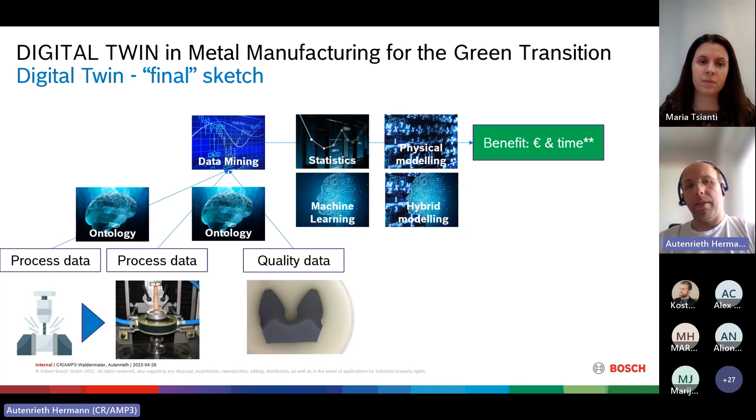When we look now for these ontologies, what it is about: on the left side you have the furnaces, so this is really the processing chamber itself. And there you have already quite different setups of these chambers. So it's now for a nitriding process, but though it's always a nitriding process, you have already differences in the kind of machine you have.

By this nitriding process, for example, you change the nitrogen content at the surface, and by this you change the hardness in this outer layer, and by this you can influence the wear resistance. For some applications this is enough, but there are other demands, requirements where this is not fulfilled. But it shall show in tendency: you have the furnace, and then you have your kind of results at the component with the microstructure.

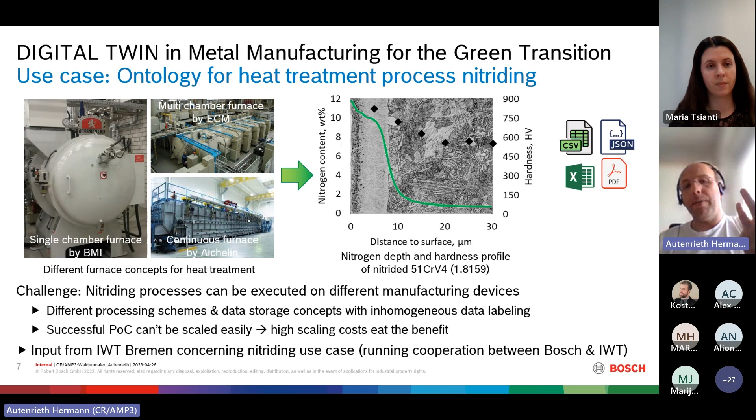And now the challenge is that when you want to digitalize this aspect, you have in many cases very different formats of data. So you have Excel, CSVs, JSON, PDF, and so on. And when you want to really evaluate the results, or train models based on it, it's difficult to bring all this data together. So now the question is, how can we do this?

And one aspect is now to bring this into a general format, and you can use ontologies for this. So now I want to show the steps you have to do to come to it, and show it with the example of this nitriding process, which may also help you perhaps to transfer this to your kind of processing.

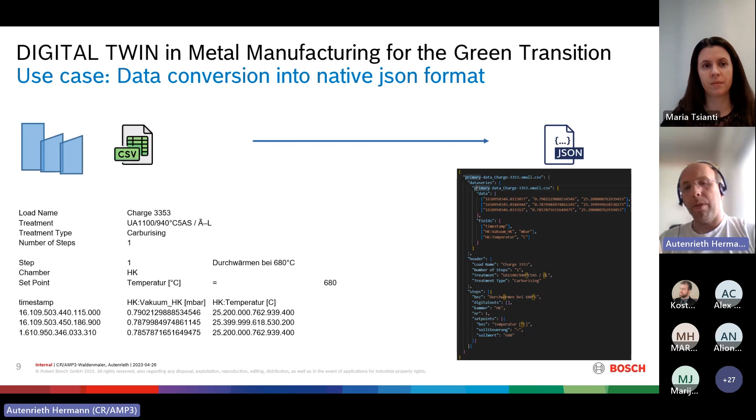So you have on the left-hand side, for example, a CSV file. There are several parameters, temperature, time, and so on. And now the first step we used was to transform this into a JSON format, a native JSON. This means you have a bit more structured data in it. So you separate time series, for example, from scalar values. The JSON format has exactly the same content, it's only the same, but the format, how it's used, is now different. It's a bit more appropriate to the data which you have.

On the second step, you make a transfer from the original CSV files into some kind of common language. So when you have, for example, a temperature, in German it may be named Temperatur, in English it's temperature, and so on. You want the program described in one language, and then you transfer this into one language which everybody, or algorithms, can understand. So that's the first step.

The next step is you transform this into a canonical JSON, with some kind of vocabulary behind it. And then, to bring more information into the data, you couple the data points that fit together.

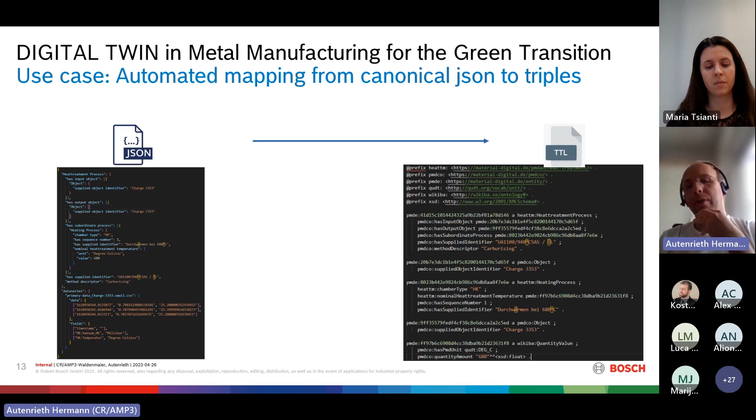For example, when you have a furnace, it has different sensors. It can measure the temperature, the nitrogen, and so on. Then you can couple that a furnace has specific sensors. So you make triples, some kind of sentence to bring together what is part of each other, and transform this format into some kind of language which couples together the relevant information.

Here it's shown a bit how it's set up. So you say, okay, I have a heat treatment process, for example. This process has some objects, and within these objects is stored which kind of batch it is. The heat treatment process also has some heating process, where quantitative values are stored. Thereby you can build up this kind of tree structure, and by using these verbs, or connection paths, you can give the data information about what fits to each other. That's a bit the idea behind the ontology.

So somebody who is not focusing on the nitriding process itself, when he sees this kind of representation, can much more easily have an idea of what a heat treatment process is and how it's set up, compared with the format you have on the left-hand side. That's the idea behind it.

This you can also apply for different kinds of furnaces. So the idea is, when you have these different furnaces in different plants, you can use methodologies like machine learning methods, which can then work with the data based on this vocabulary. So you can scale up your methods and statistical evaluations better.

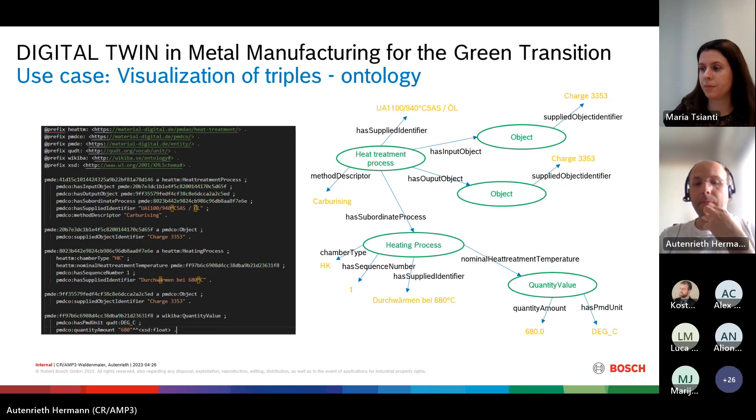...the vocabulary, where you describe your processes with this kind of vocabulary. Then you make these triples, connecting what is part of each other, what is a property of each other - what dimension a quantity has, and so on. So you get this tree-like structure, and based on this representation, you can then use different analyses, simulations, and so on.

But this is a first step you can do to bring your data into a better condition.

So I want to conclude my talk now. I gave one example of what is, in our opinion, an important aspect of the digital representation. When you have this digital chain, you can use these methodologies quite well to find optimization strategies - it can be time, money, or sustainability - but you have to design this for your specific use case.